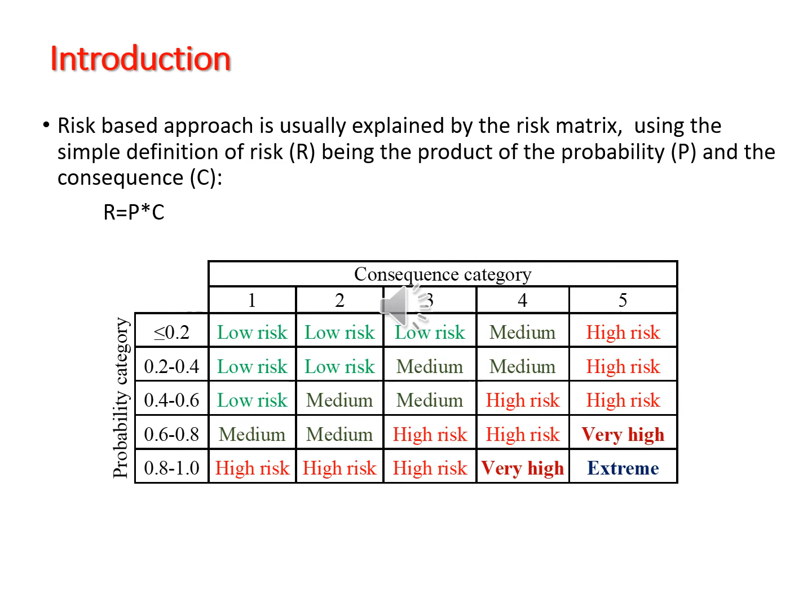In this slide, you can see risk matrix as obtained by consequence and probability categorized in both cases from 1 to 5. Since we define risk here as the product of probability and consequence, thus we have 25 different fields in risk matrix, indicating low risk in green color or medium risk, also in kind of green color, then high risk, which is red, and then very high and extreme risk.

In this slide, you can see consequences described in details, taking into account effects on people, property, environment, and reputation. In combination with event frequency or probability, then we can get this green, which is low risk level, yellow, which is moderate risk level, and red, which is high risk level.

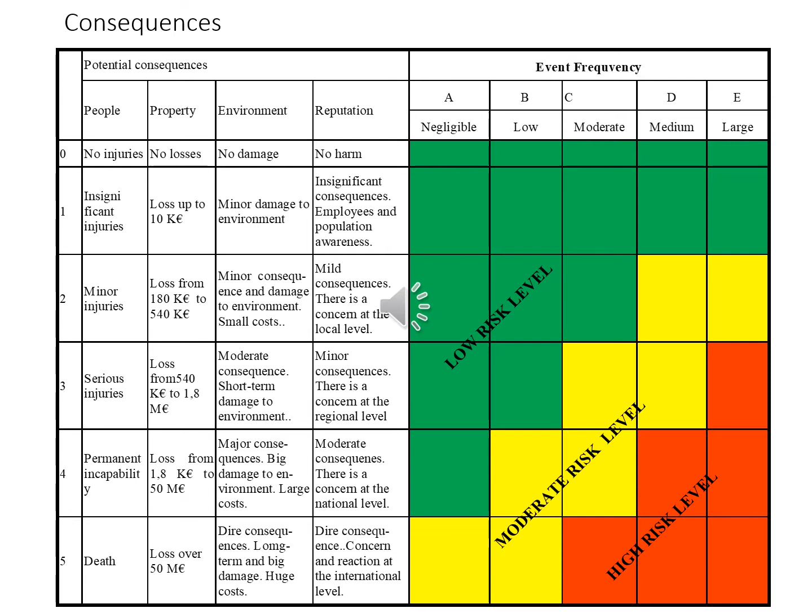Anyhow, focus here is not on a consequence, but rather on the probability. So we have introduced in a couple of previous papers how to deal with probability of static failure. And for that, we used failure assessment diagram, a simple engineering tool, and we defined probability as the ratio between a distance from the service point to the zero, this is OA, and the total distance that this service point would have if its loading was increased up to the critical value, which would be point B at the limit curve.

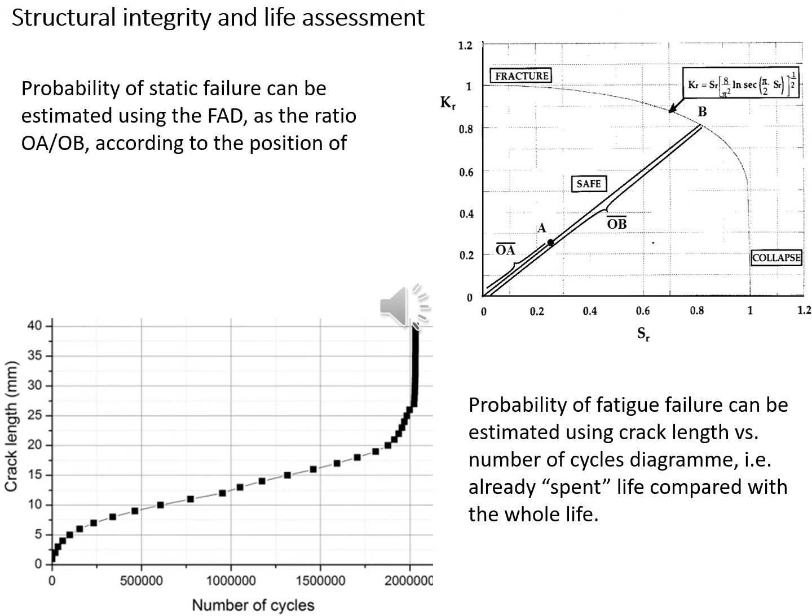On the other hand side, now we introduce also probability for the structural life, and once again as the ratio, in this case between the number of cycles and the total number of cycles. Total number of cycles would be the limit value that fatigue failure is expected. To explain this better, we use a case study here.

It is oil rig drilling pipe, also called casing pipe. It is not that much of a problem regarding the consequence. It would be a kind of moderate consequence, something like category 3, because it affects environment and not a big deal even in that sense. But we need to estimate risk because of probability, which might be relatively high, since these welded casing pipes can contain defects of crack-like type, and they do fail from time to time.

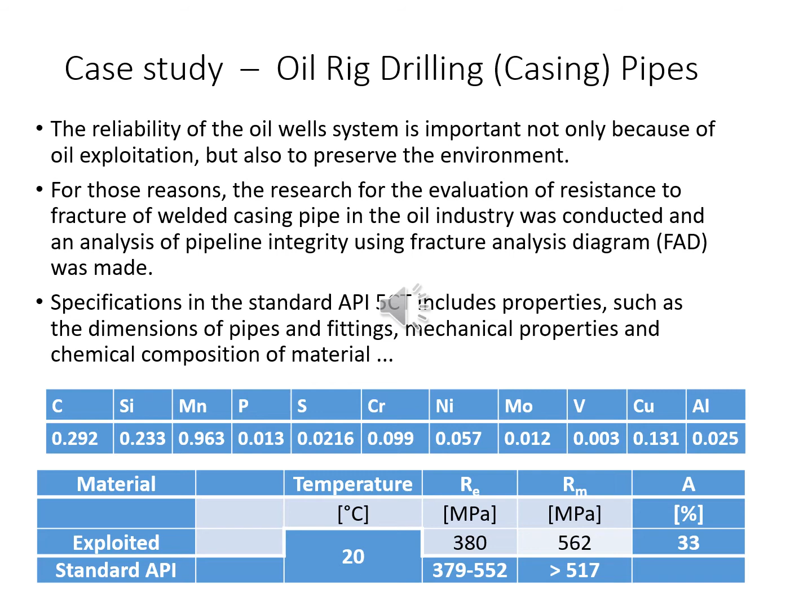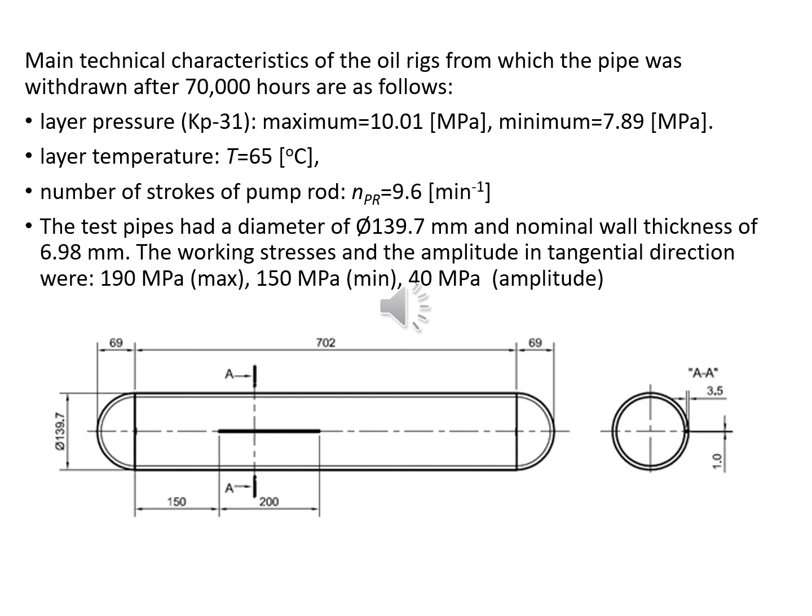You can see typical chemical composition and basic mechanical properties in this slide. Data that we will need is for the pipe withdrawn after 70,000 hours of exploitation, which was due to maximum and minimum pressure. It was between 10 and 7.89 megapascals. Temperature was 65, number of strokes 9.6 per minute. Geometry of pipe is given in this slide. Diameter is practically 140 and wall thickness 7. Now we can see how the points.

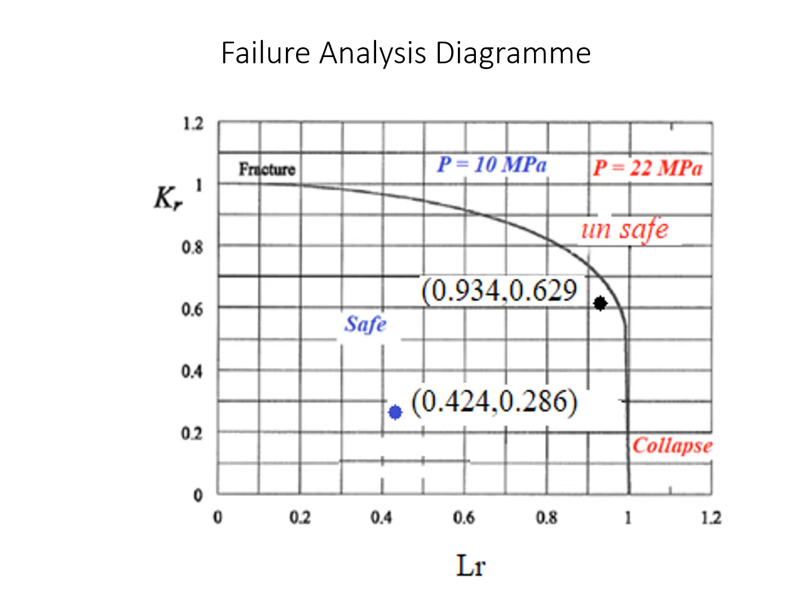Now fatigue life calculation was done in two ways. Since this is simple geometry, the first way was analytical, direct integration of Paris law. The second was finite element method. It will be shown later. As for the Paris law, it's given here in the usual exponential form. Fatigue crack rate depends on two material parameters, C and M, and delta K is important parameter as well. It of course depends on amplitude loading, crack geometry given not only here but also as dependent on the ratio between crack length and the width of the component.

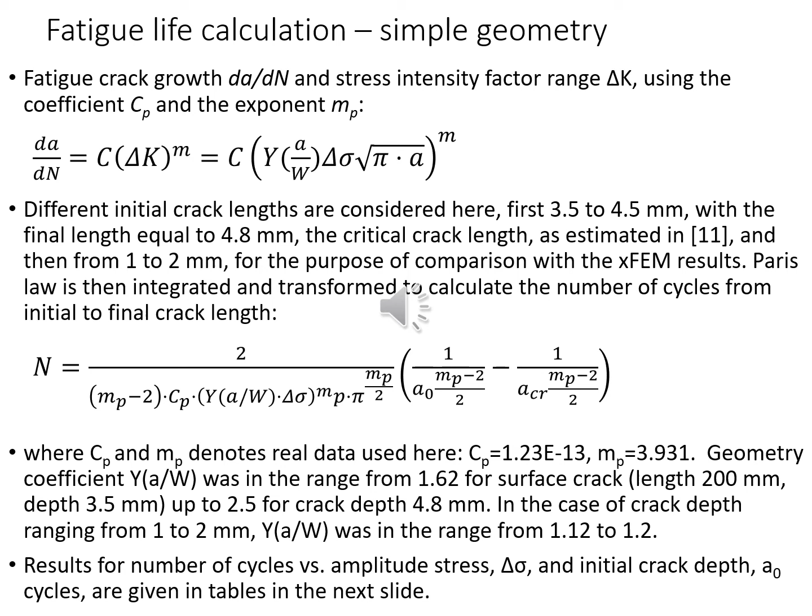So for the initial crack lengths, which were considered here from 3.5 to 4.5, the final crack length was taken as 4.8. It was a critical crack length as estimated in some other paper. But then another two calculations were made for 1 and 2 millimeters for the purpose of comparison with the XFEM results. So if we integrate Paris law, we can get equation like this here below for the number of cycles, and for the real data, which was obtained by testing this pipe withdrawn from exploitation, we could calculate the number of cycles depending on amplitude stress and initial crack length as given in the next slide.

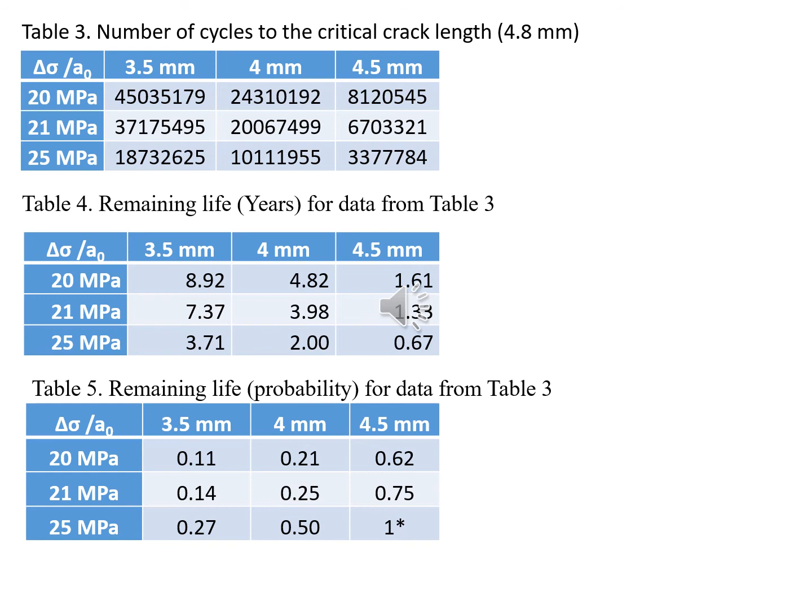So here we have three tables. The table number 3 shows number of cycles. Then table number 4 shows remaining life for data from the table 3. And finally, table 5 shows probabilities. You can see that for the shortest initial crack, of course, probability is the lowest, and of course it increases with the increasing of the stress amplitude. Then again, it increases also for the initial crack length, including the fact that for 4.5 millimeters, which then would grow just for 0.3 millimeters, this estimation is more than 1, but we of course say probability in that case is 1. So for 25 megapascals and 4.5 millimeters, failure is imminent.

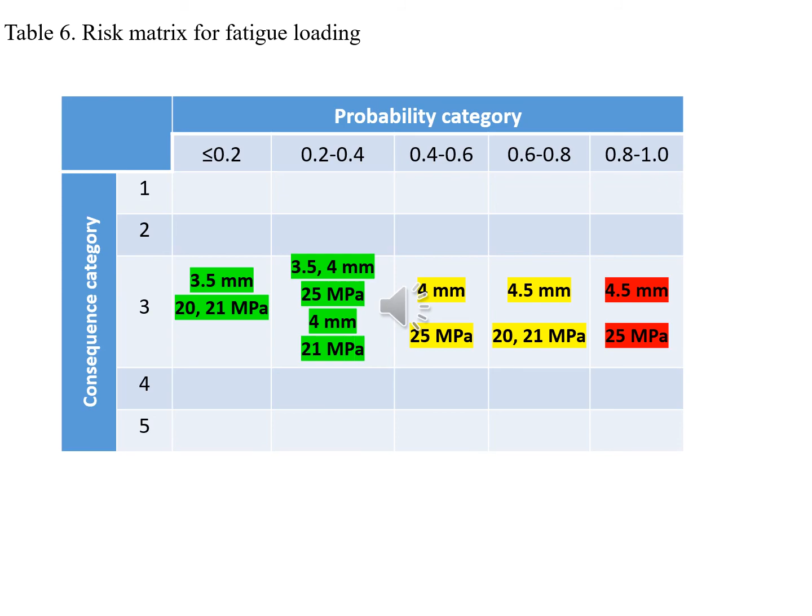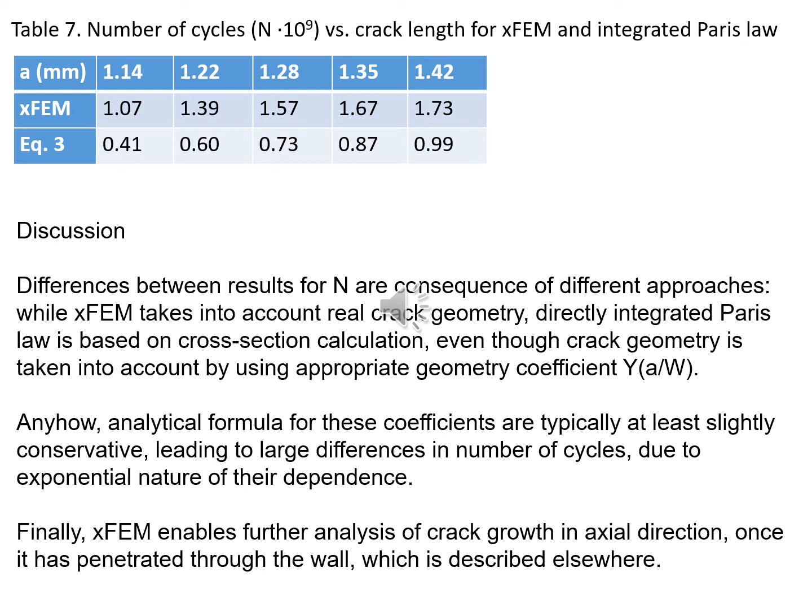So we come to the conclusions. We have seen that simple engineering approach has been used, and it turned out to be a very efficient method to assess risk. We have applied just basic fracture mechanics concepts. More generally, it was applied for static and fatigue loading, here presented only fatigue. The analytical tools we used, like integrating Paris law, turned out to be over-conservative, even in this simple case study. So for more sophisticated and precise analysis, we really need finite element method.

And at the end, one important comment, probably the best use of this approach is to bridge the gap between engineers and managers, because engineers are focused just on the problem itself. Managers typically don't understand the problem, but they know what should be the best for the company, and engineers don't know what is the more general view of the company future or company economy or whatever. So they should work together. They should exchange their experience, and the best way to understand each other is to use risk matrix.